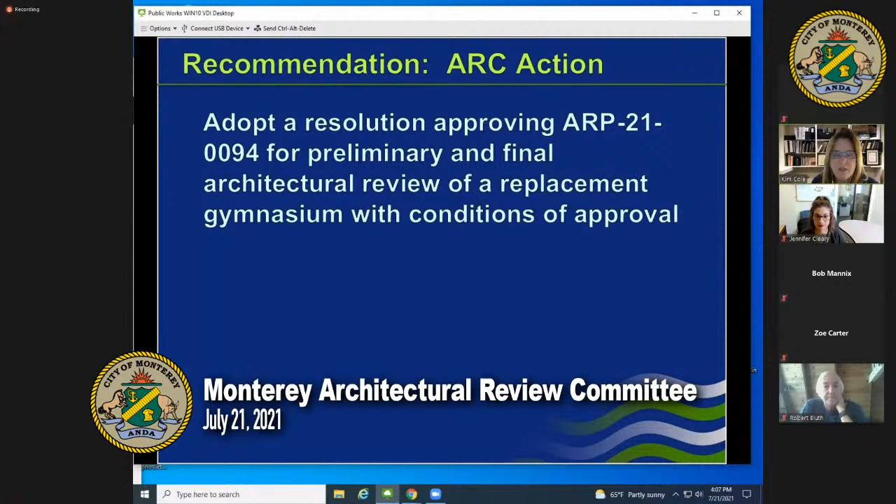The staff's recommendation is that the ARC adopt a resolution approving the architectural review permit for preliminary and final architectural review for the replacement gymnasium with conditions of approval.

A brief project description: the existing gymnasium social hall is right around 3,000 square feet. The replacement structure includes both a first floor and a second floor, with a total combined square footage of around 11,000 square feet. The existing parking lot will be restriped, and there will be a loss of 1 parking space.

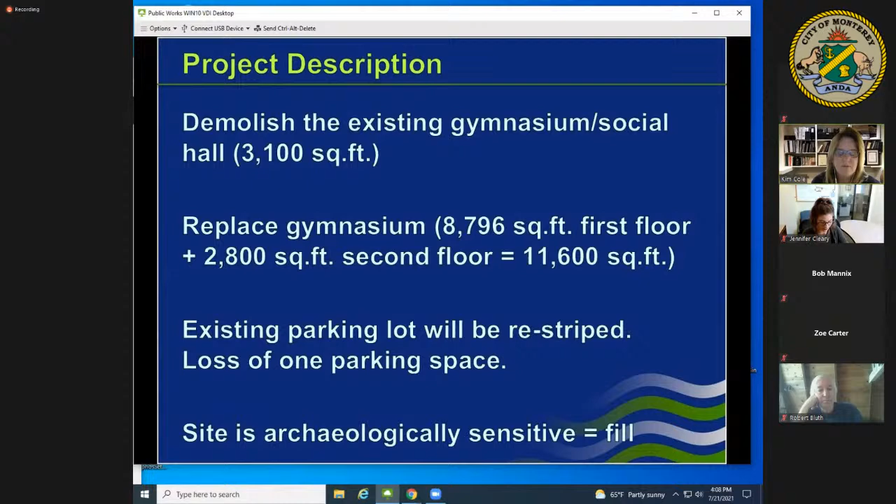A key issue that came up when this project went before the Planning Commission, as they were certifying the environmental document, is that the site is archaeologically sensitive. This has really driven the project design in a lot of ways. The applicant has strived to not dig on this project site, and instead proposes to install fill and have a very unique foundation system so that they don't disturb the area under the footprint of the building.

This is a bird's eye aerial photograph of the site. The red teardrop marks where the existing gymnasium is located, adjacent to Webster Street, with a very large parking lot in front of the building. Directly behind the building, the structure with the white roof is the YMCA building — that's the back of the YMCA — and adjacent to it you see the soccer field for the school.

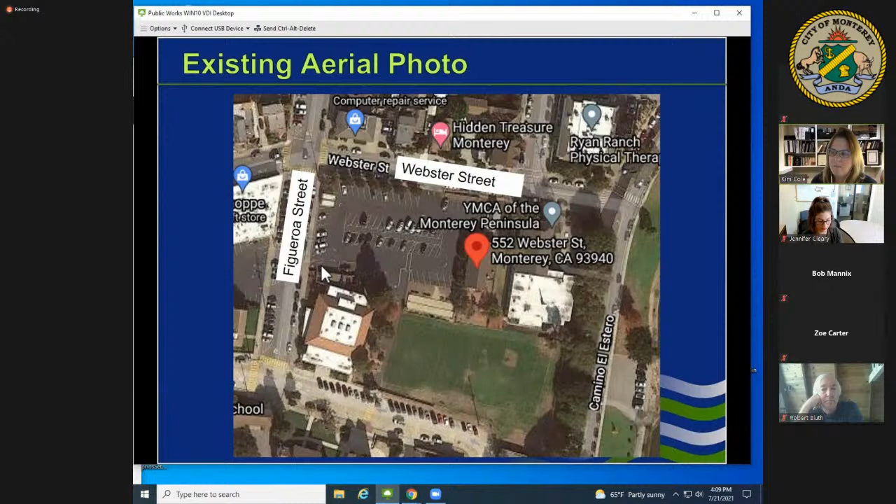Closer to the corner of Figueroa Street, where the campus is, you see there's a social hall for the school.

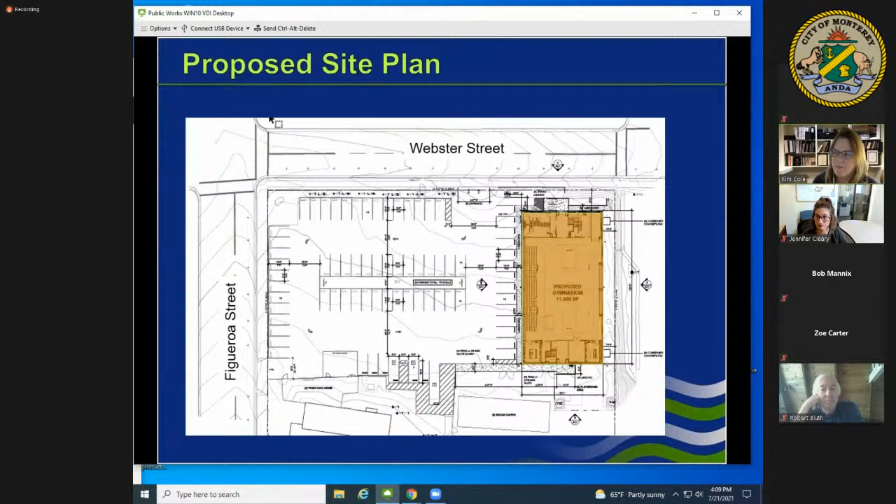This is the proposed site plan, showing the 3,000 square foot building and the proposed gymnasium at 11,000 square feet. The first floor is basically a sports gymnasium, with area for the kids to play, locker rooms attached, and some seating within the gym. On the second floor, at each end of the building, there's storage, electrical, and mechanical rooms, comprising somewhere between 2,000 and 3,000 square feet.

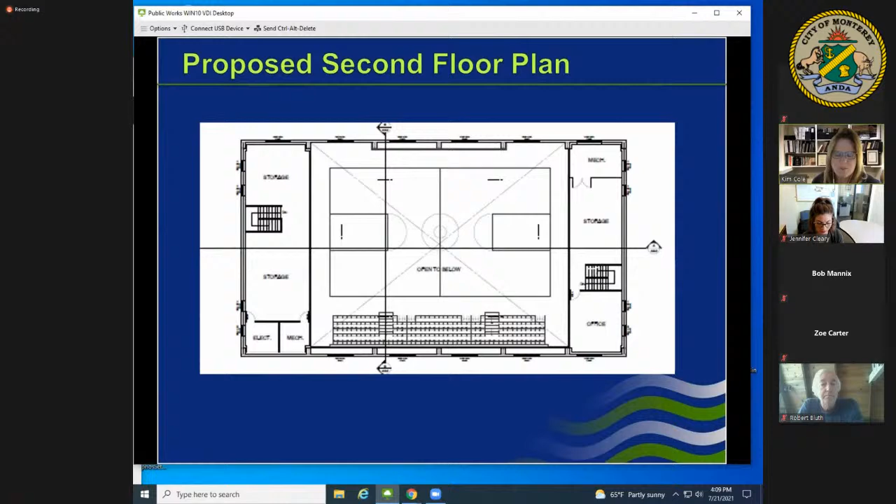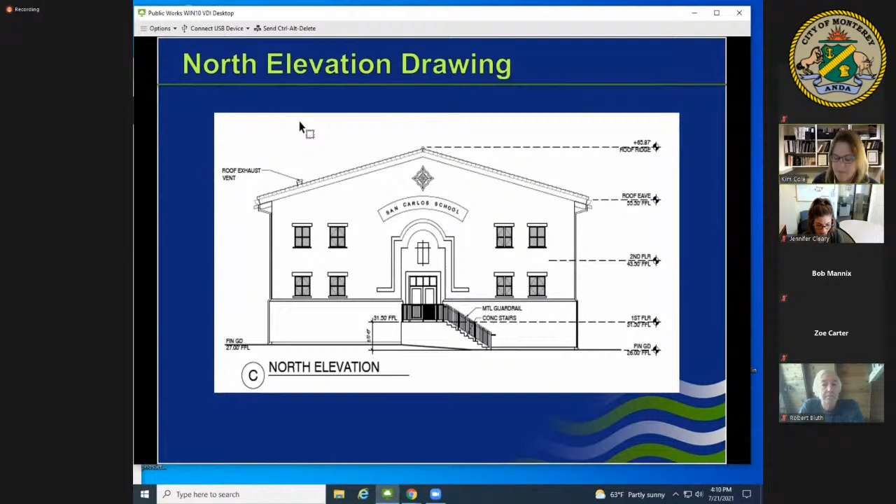This is the north elevation, facing Webster Street. I think of it as a very traditional style building — it has a gable roof, and you'll walk up into the gymnasium. On the portion of the building facing the soccer field, there's a grade difference between the Webster Street side and the soccer field side, so you see a ramp up into the building as you come from the school side of the project.

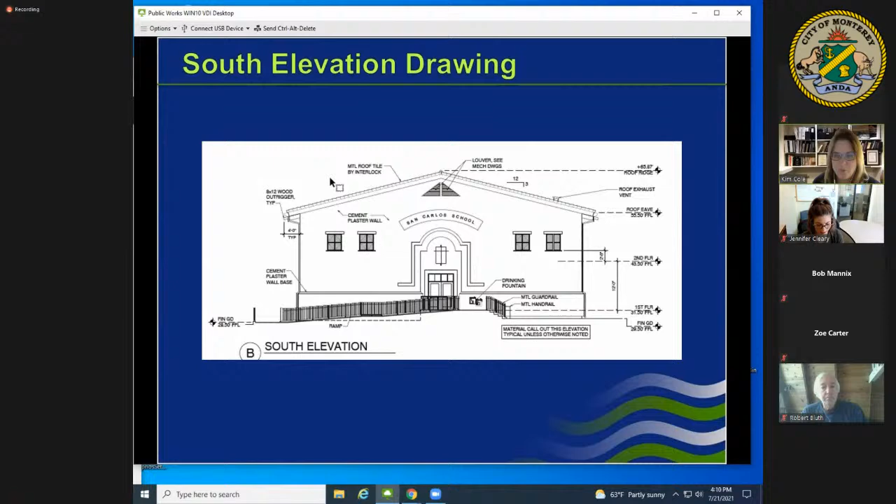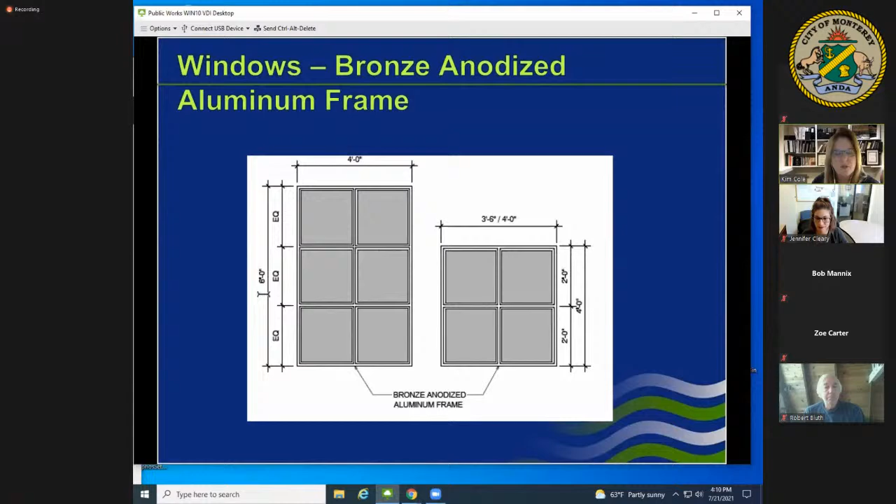The proposed windows are bronze anodized aluminum frame windows, a divided light window style. They're fairly high up on the structure, as we saw, and have a traditional feel to them.

For the roof and paint details, the building will be painted a warm beige color with an accent of brown trim, and the exterior door entrance will be a brick red. You can also see some of the traditional railing here in this diagram.

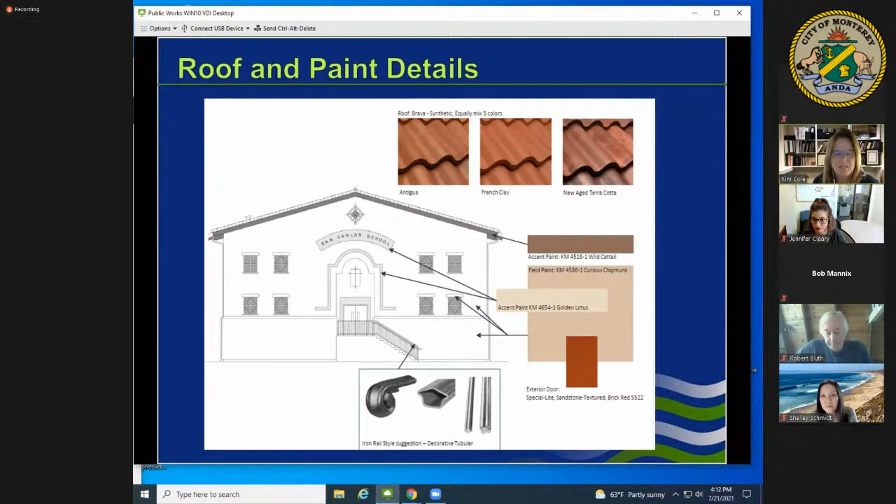One piece I got wrong in the staff report was the roofing material. They actually evaluated a whole series of materials. You may remember from reading the staff report it talks about a metal roof in the shape of a tile — they are now proposing a synthetic panel type material that will interlock and mimic a traditional clay tile roof. It has a lot of dimension to it, about a half inch thick. After this presentation, Chris Schmidt has an actual example he can hold up to show you the dimension of the proposed synthetic material.

The lighting was an issue brought up at the Planning Commission level from an adjacent neighbor concerned about an existing pole light within the parking lot. The developer was not originally planning to change that light fixture—it wasn't part of their vision—but the existing light does give off a lot of glare. In response, the applicant is proposing to replace the light with the fixture shown here: an existing pole in the parking lot will have a new fixture head with sides, so the bulb will no longer be below the sides of the fixture, creating that glare environment it currently has today.

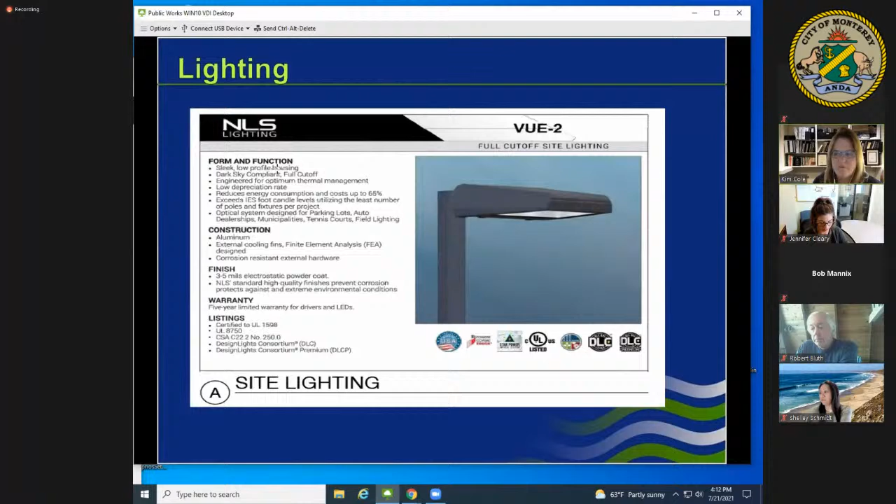On the building, there's a couple of wall sconces proposed, as well as some recessed down lighting proposed on the building. This will fit within the recesses of the building.

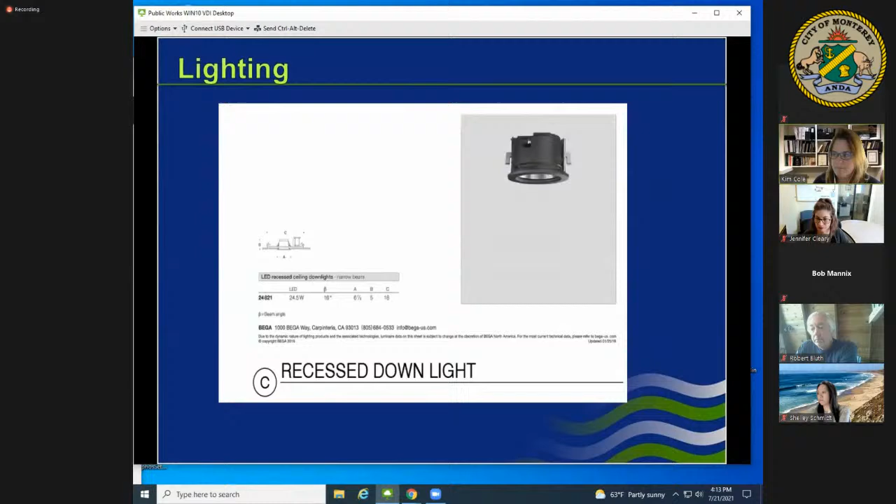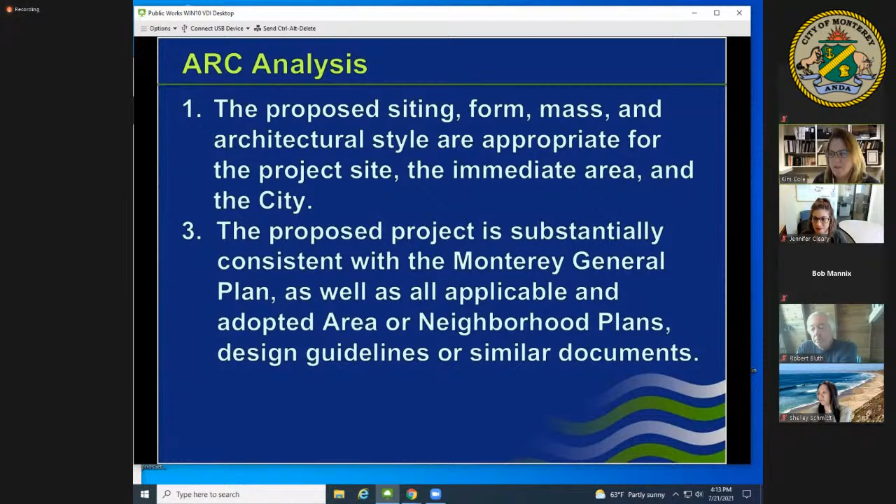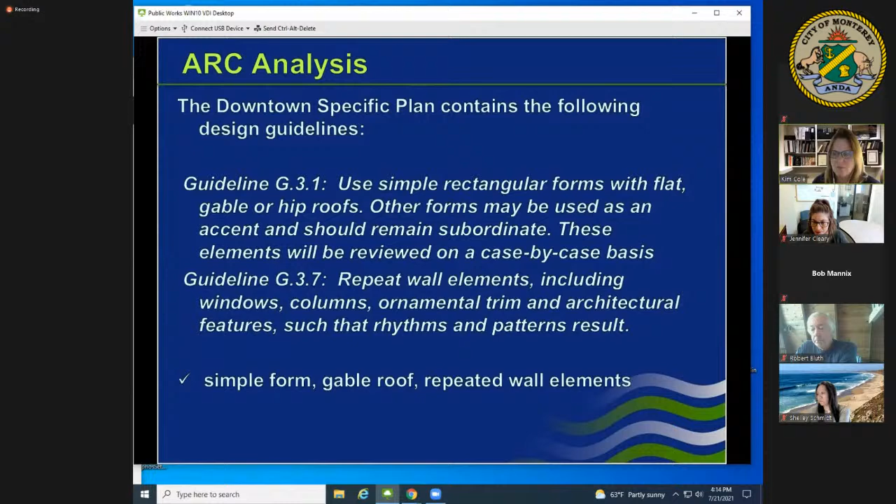The Architectural Review Committee findings basically look to see if the siting, form, mass, and architectural style are appropriate for the site and area, and whether the project is consistent with our planning documents. The downtown specific plan contains some guidance for this area—it encourages buildings to use simple rectangular forms, and I think this building completely complies with that. It also recommends flat, hip, or gable roofs; this is a gable roof, so it complies with that guideline. In addition, it recommends a traditional style with repeated wall elements—windows, columns, trim, architectural features that create patterns—and as you saw on the elevation drawing with the anodized aluminum divided light windows, staff thought there was a good rhythm created that met that design guideline.

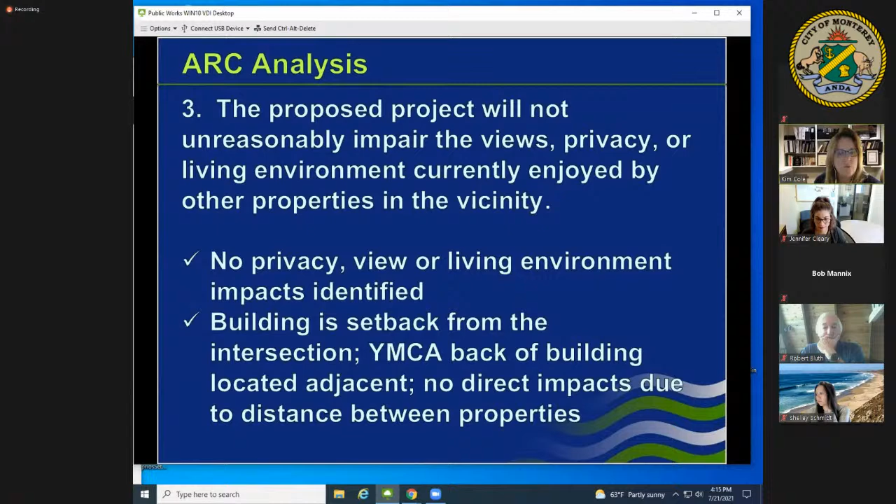There's also a finding about views, privacy, or living environment. Staff did not identify any privacy, view, or living environment impacts. Some reasons for that: the building, as seen on the site plan, is significantly set back, there's a fairly large existing parking lot, and landscaping surrounding the project site. This building will be at the back of that existing area. The YMCA building that directly abuts this is the back of the YMCA building, so there's not really a visual relationship between those two buildings that would be compromised. Looking at the height and locations of the windows and the proposed use—a gymnasium—the windows are fairly high up, so there's no direct window-on-window privacy issue or view issue over this property.

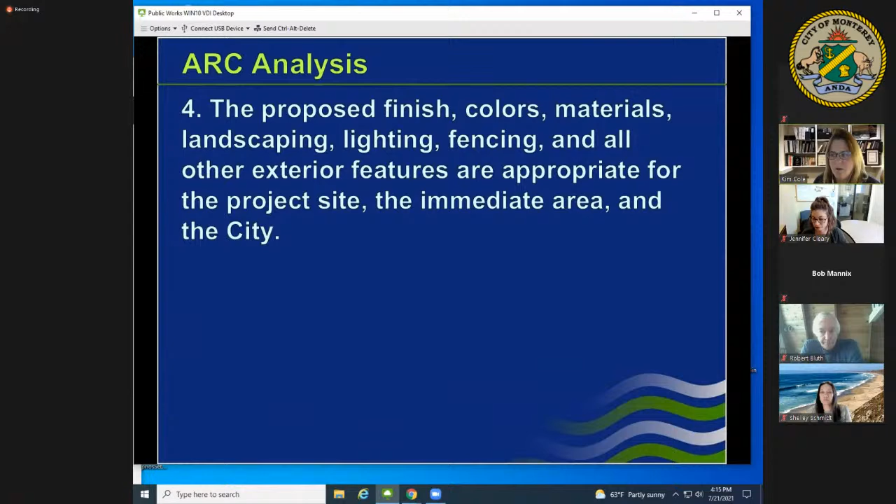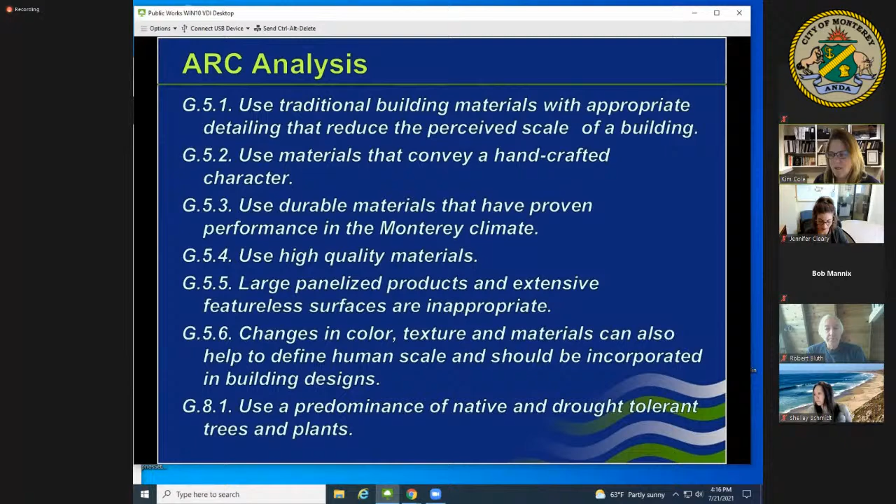Lastly, you're looking at the proposed colors, finishes, materials, landscaping, lighting, and all exterior features being proposed and whether they're appropriate. Our ARC guidelines from the downtown specific plan get very detailed in this area—they want us to use traditional building materials, materials that convey a handcrafted character, durable materials with proven performance in our climate, and high quality materials. They don't want large panelized products or extensive featureless surfaces; changes in color and texture can be appropriate, along with predominance of drought-tolerant native plants.

So the building has a very traditional form, especially for the project site, in that it's stucco. The divided light windows can also be found directly within this campus and are a nice feature. As for the roofing material, the Planning Commission really requested that the ARC look at that carefully. The applicant has spent a lot of time on this issue—they looked at metal, they looked at tile forms—but they are proposing a synthetic roofing material with a dimension of about 1/2 inch to provide the feel of a real tile roof, while also minimizing the structural weight of the building on the fill material that exists on the site.

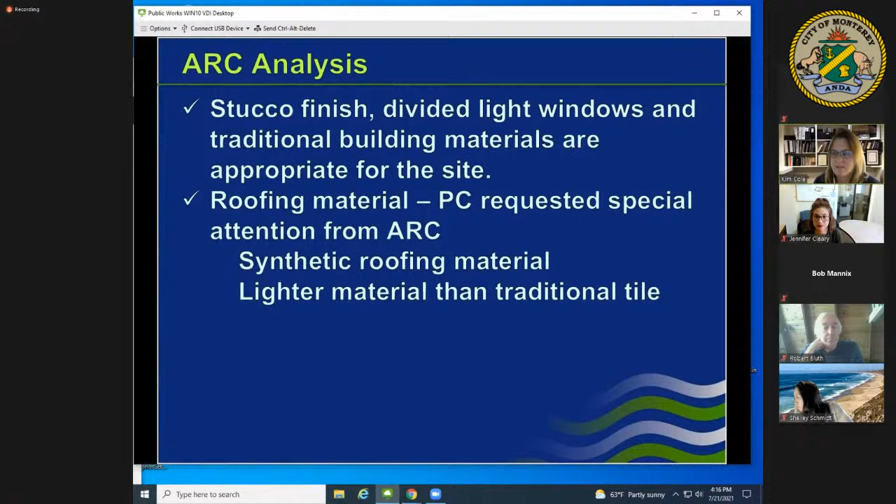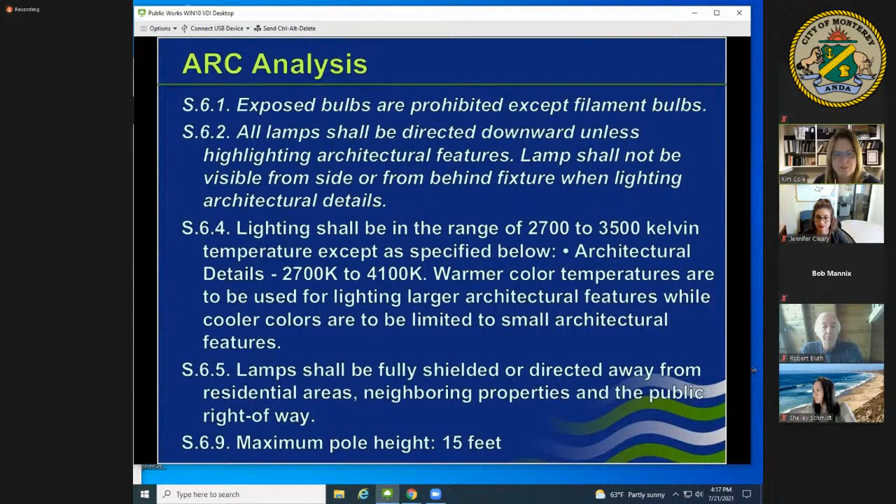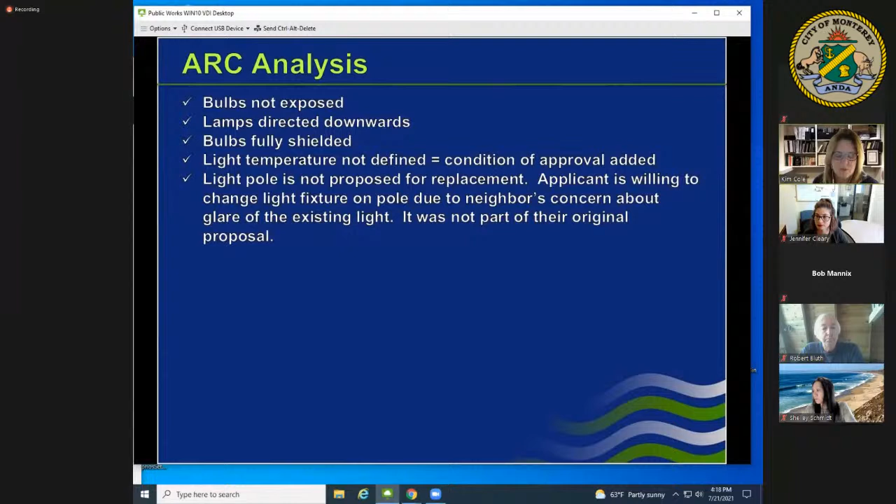Our design guidelines also address lighting. Exposed bulbs are prohibited—you saw the light fixtures, there are no exposed bulbs, they're fully shielded within the fixture. All lights have to be directed downwards, and these are; you saw the fixtures, they all point directly down. The piece that wasn't provided on the light specification was the Kelvin temperature—our guidelines recommend between 2,700 and 3,500 Kelvin, a warmer light for LEDs—so there's a condition of approval in the resolution requiring the Kelvin temperature to be verified within that range. Lamps are required to be fully shielded, which they are, and there's a maximum pole height of 15 feet. In this case, the existing pole in the parking lot is not proposed to be replaced, only the light fixture on the pole, to deal with the glare. As mentioned, that wasn't really part of the applicant's original vision, but they were trying to address the neighbor's concern.

I didn't mention the landscape plan, but the landscape plan in your packet does include drought tolerant species. It was prepared by a very qualified landscape architecture firm, and we believe it meets the intent of the specific plan. So staff is recommending you adopt a resolution approving preliminary and final architectural review for the site. I'm happy to answer any questions.

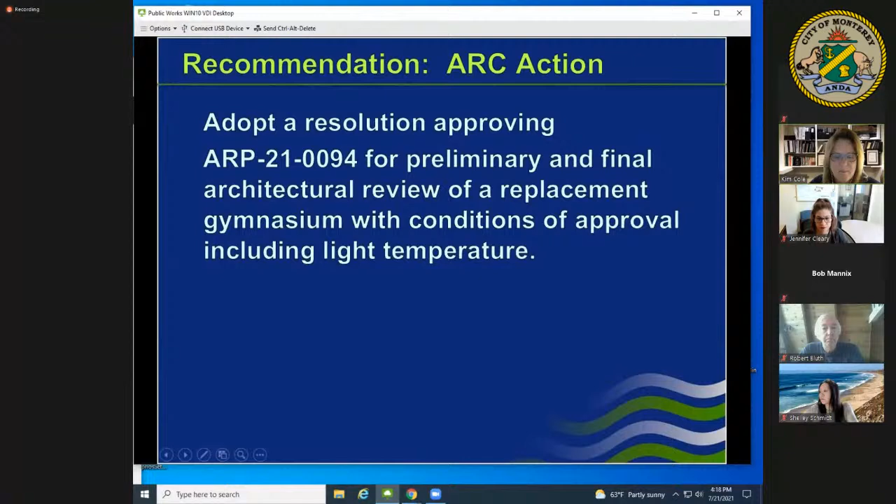Thank you, Kim, that was really thorough. Are there any questions for Kim about her presentation? Go ahead, Ed, I have one.

You mentioned that building the foundation on fill is a new or novel technique. Has that been used successfully elsewhere? I'm not familiar with that particular technique of foundation for a building. I don't think I've seen it at this extent before. The architect worked very hard with the contractor and engineers to develop something much more extensive than we've seen before. Paul Davis, the project architect, is on the call and can speak to the foundation system in more detail. So it is unique.

We'll get to you in just a second, Paul. Are there any other questions for Kim? Okay, great. Would the applicant like to make a presentation, or you can start by answering questions, Paul? Can you hear me, Paul Davis?

Thank you for considering this application today. It is unique. From my years on the Historic Preservation Commission with Kim, we know this site is one of the most historic sites west of the Mississippi. So we spent a lot of time not only designing a project that would tie into the rest of the diocese campus there, but would also limit any impacts of grading that might disturb archaeologically - we just don't want to get into the ground and disturb anything there that's important.

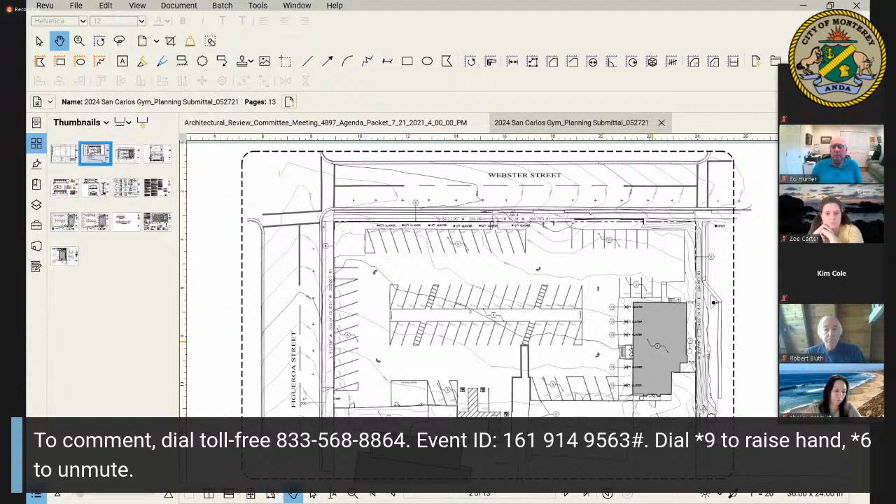There's the existing footprint of the existing building that's there now, so you can see from our footprint, when we get to the new site plan, how small the play surface was that they have inside this hall. It has a commercial kitchen, which we are not bringing back into the new project. It will be, we call it a gymnasium, but really it's the PE activity area for all of the students at the school, since it has a relationship to the bocce ball courts and the athletic field. So it'll be used for a variety of student activities, athletics, drama, or just large assemblies.

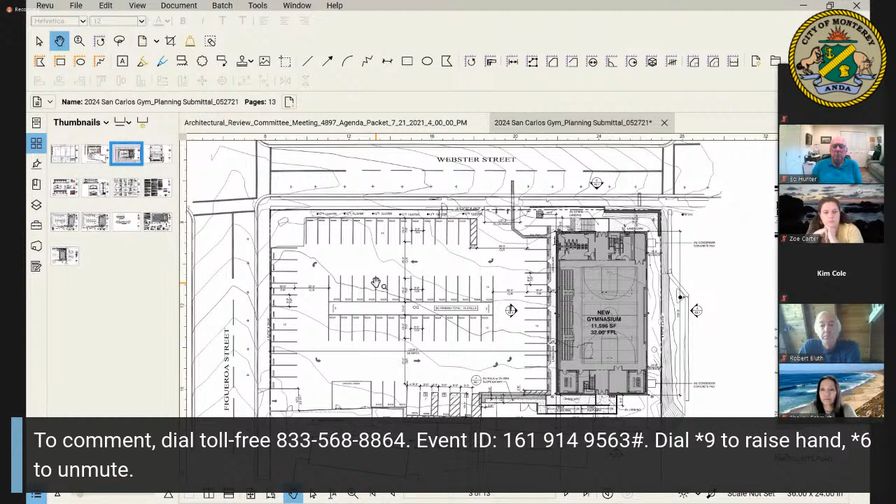Maybe the next site plan. So you can see the site, this gymnasium size site plan and the building, and on the plan south and plan east, those are directly on top of where the existing walls are of the existing building. Now we are expanding past those, but that's the structural system we're using, like I said before, will be all above ground. Maybe the floor plan then, Catherine.

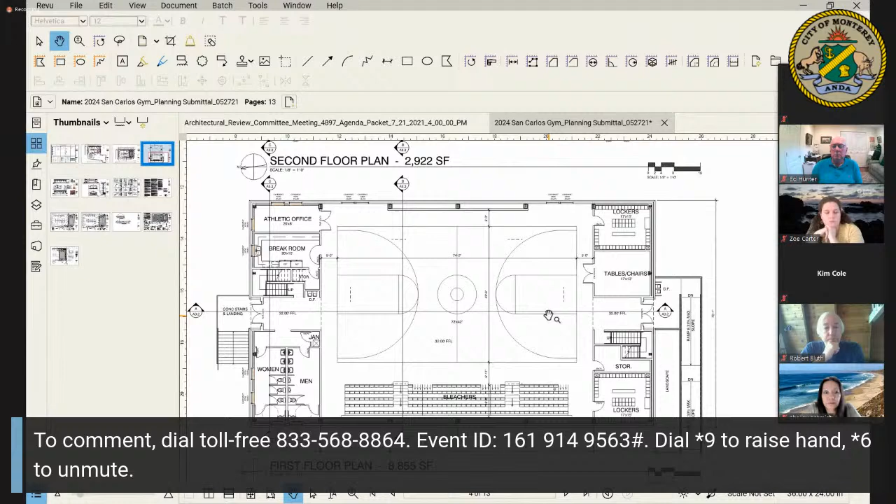So this is the court, locker rooms, storage for tables and chairs, and restroom facilities. And because we have the height and the structure to be able to play basketball, we wanted to take advantage of the north and south sides to give the school a lot of storage that it doesn't have right now. And in this building will be the offices of the physical education instructors.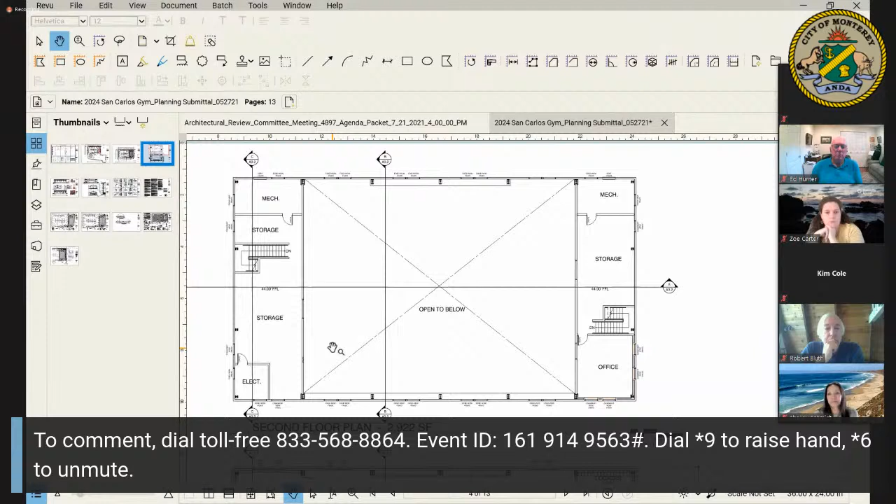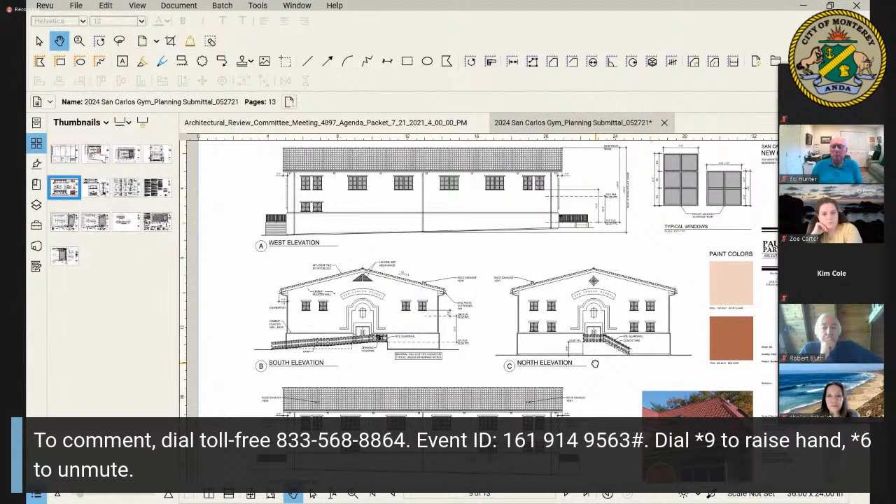Let's go to the exterior elevations. As Kim said, we tried to tie this into the architecture that is already in context in this neighborhood. The colors being used are the same colors used on the other buildings. The roof tile is something Chris will show you shortly.

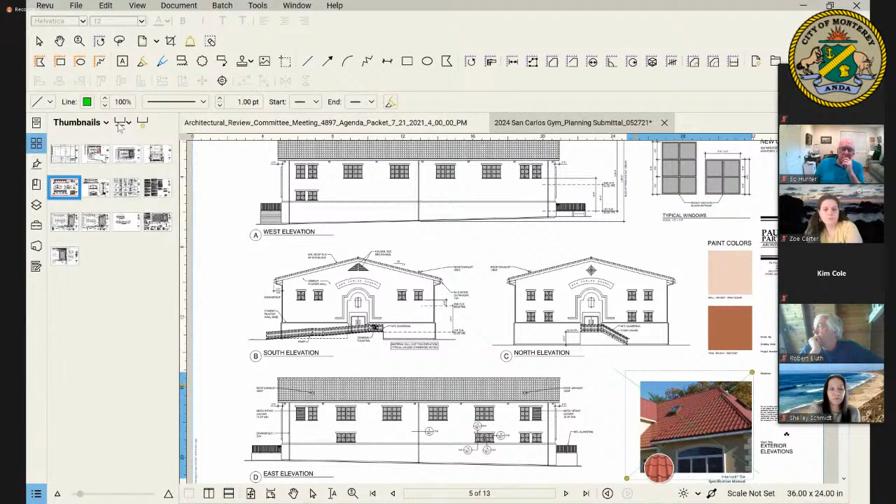There are several different colors in that tile, so we're going to be able to mix and match them. We're able to take those three colors and have a mix and match on the roof to generate a sense of age and volume with the lookalike tiles we're proposing. It's important for us because we're really trying to limit the weight as much as possible on the building for this foundation system.

We first proposed a molded metal sheet that looked like barrel tiles. This is a little bit more than that, but we've been able to fit under the design parameters of the building. We were using some suspended ceilings between the steel beams just to finish it off inside the building, but we're removing that weight as well, just to give us an extra safety factor.

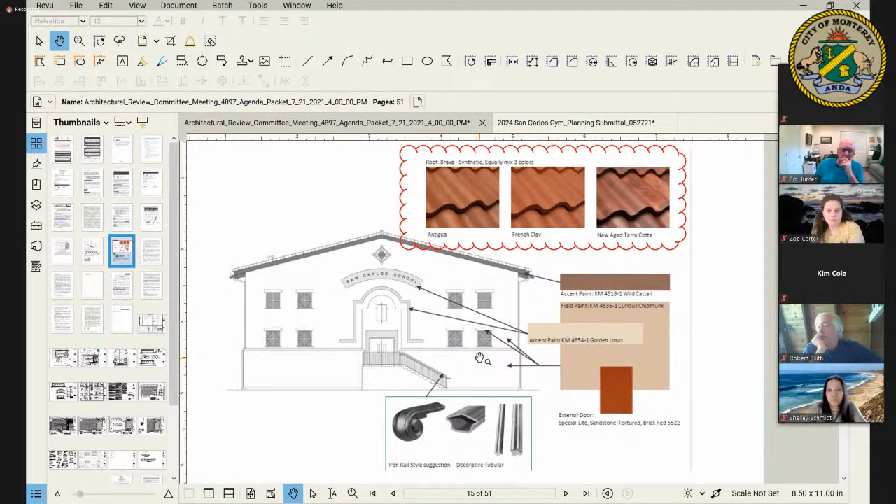These are the color finishes, and we really want to try to be respectful of its setting and use good finish materials in the hand railings.

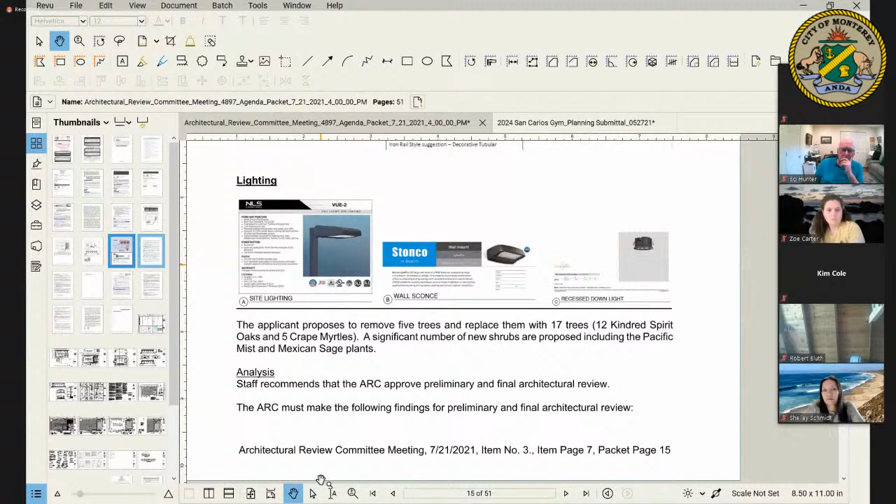The lighting is very, very subtle. When you look at this—go back to the elevation—where that door inset is, right above that door inset is where the downlight will be. So it'll just light in front of the door and not spread out from there. All of the other small light fixtures are just lighting the ramps and the stairways on the north and south side.

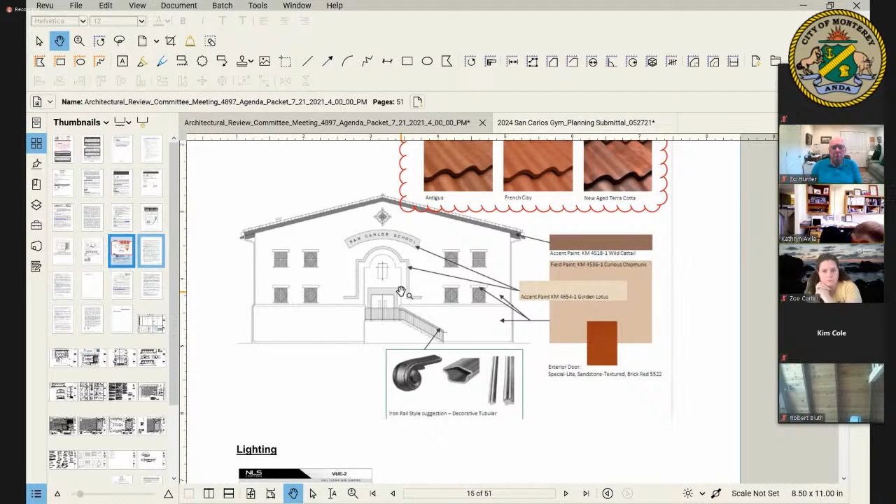So we aren't going to be ringing the building with those other wall sconces. I talked about the roofing and the weight and the variation of color that we can get with those colors you see there. The structural system does add about 2 feet to the height of the building, but at least it helps preserve the archaeological resources that we know exist on the site. We just hope that a very traditional design and look will fit in with the rest of the buildings that the diocese has on these blocks.

And I'd be available for any questions that anybody might have. Are there any questions for Paul? I can't see everybody, so if you have questions, you can go ahead and speak up.

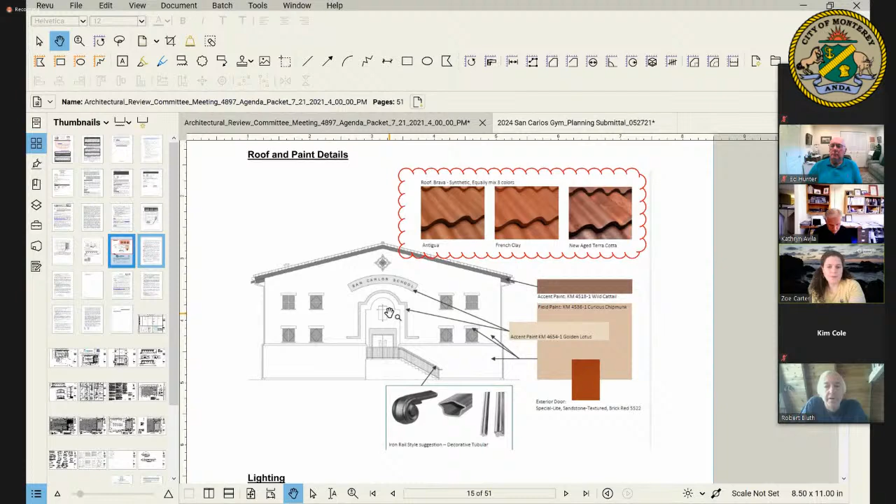So the roof tiles are primarily being utilized because of weight issues, and that's because of that new foundation technique you're trying to utilize. Yes. I mean, natural clay tiles or cement tiles—the weight of those would just make the project more difficult.

And so this is a kind of a composite tile that will weather very well. The color is all the way through that material, and it provides a dramatically different reduction in weight from regular clay tiles.

So I'm assuming that if you used regular clay tiles, you just wouldn't be able to utilize the foundation technique you're using. Well, it may require a much thicker floor section. Right now we have about a 15-inch concrete floor section with all of these waffle voids in it. So we would have to increase that size of thickness, and that would raise it up a little bit more.